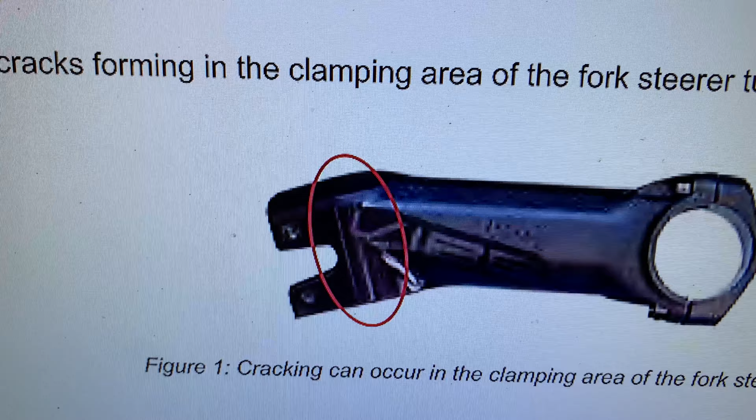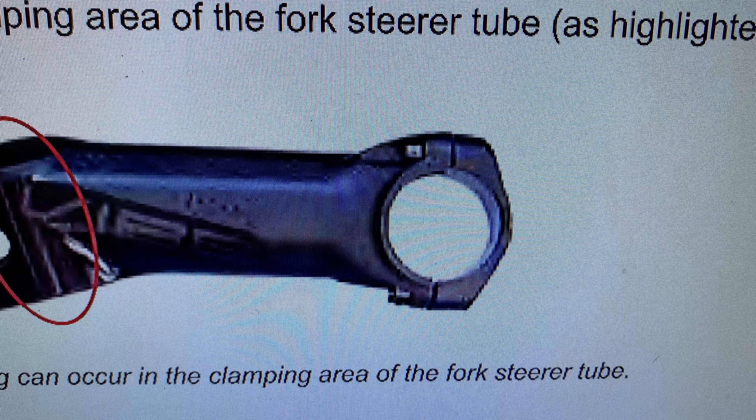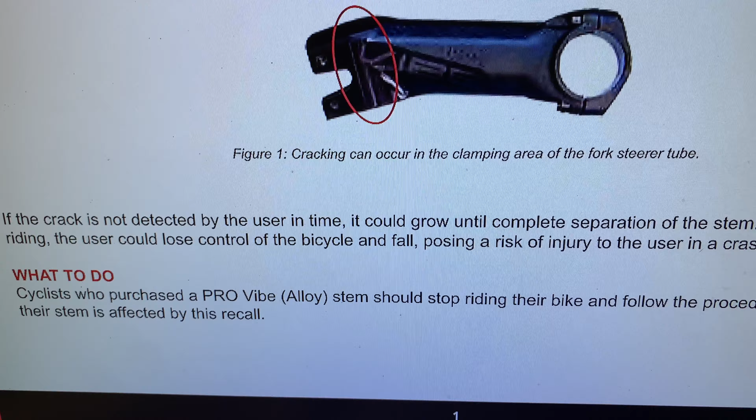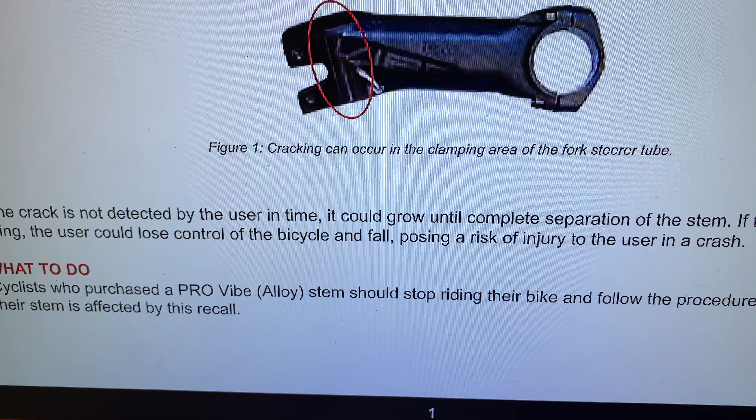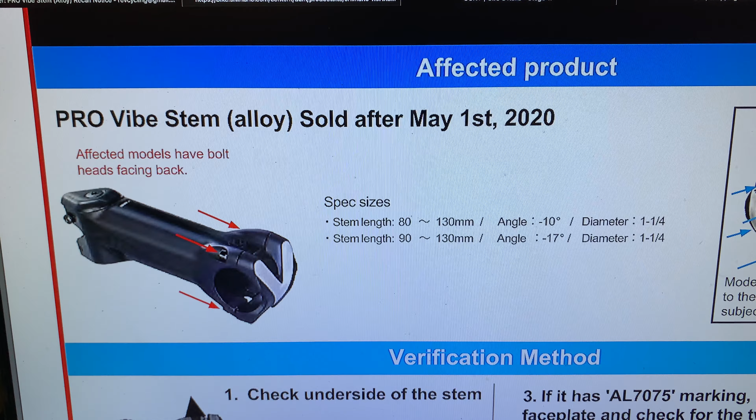Now what is happening? Let's scroll down a little more. There's a crack that apparently is forming in this area, in the clamping area where the stem clamps to the steer tube. That's interesting, because you would think that area is quite built up, and I would think you'd have more issues on the front end of the stem.

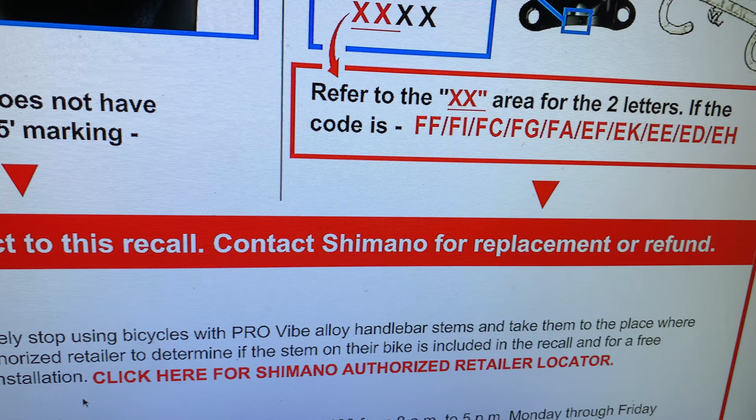But the crack is happening here, and there's talk of corrosion. If you sweat a lot, if you're a heavy sweater, maybe you do a lot of climbing and the sweat drops down, or you're riding your bike on a trainer, or maybe you're a triathlete over your aero bars - salt from your sweat corrodes everything.

So this recall goes all the way back to May 1st of 2020. We are now in 2023. And it tells you how to check for it.

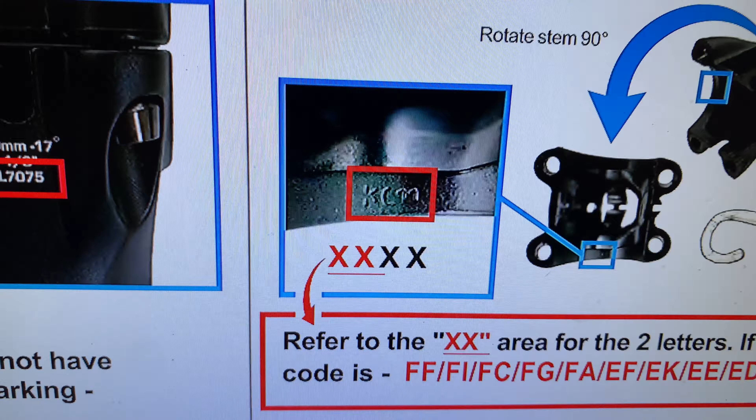Now underneath the stem, depending on which orientation you have it, you're looking for this AL, which is aluminum 7075. If it does not have that marking - kind of like a flow chart - if it does not have that marking, the stem is subject to recall. Contact Shimano for replacement or refund.

There is another way to look for it: you take the stem, rotate it 90 degrees, and look on the inside portion of the clamping area where it attaches to the handlebar. You're looking for this - according to them it's supposed to say XX, but I can't really tell what that says. Refer to that XX area for the two letters, and if the code is FF, FI... I don't have to read all of that to you, but that's another thing that signifies the stem needs to be replaced.

So please stop riding Pro Vibe or Pro Vibe alloy stems with these markings on them. There's a phone number you could reach right there for consumers - call that number if there's any doubt whatsoever, if you're not near a local bike shop and need to confirm whether you have one of these stems.